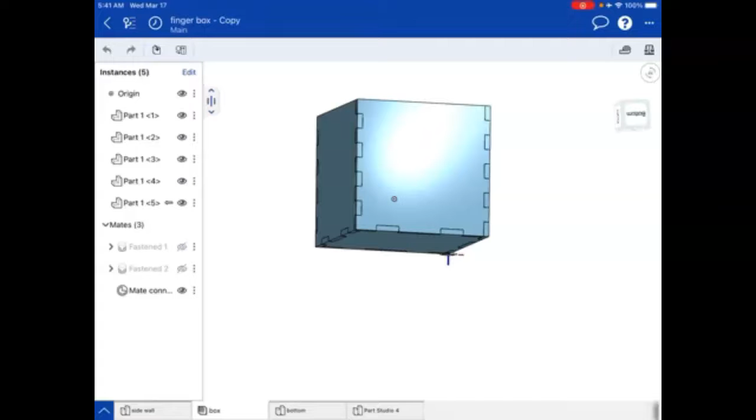All right, now let's say you're ready to laser cut and you're going to test two pieces to see if they fit together. I'm going to generate a file to laser cut the sidewall and the bottom of this box and show you how to do this. And you can choose any two parts that you want, but you want to choose two pieces that connect together as a trial to see if your design sketches are good.

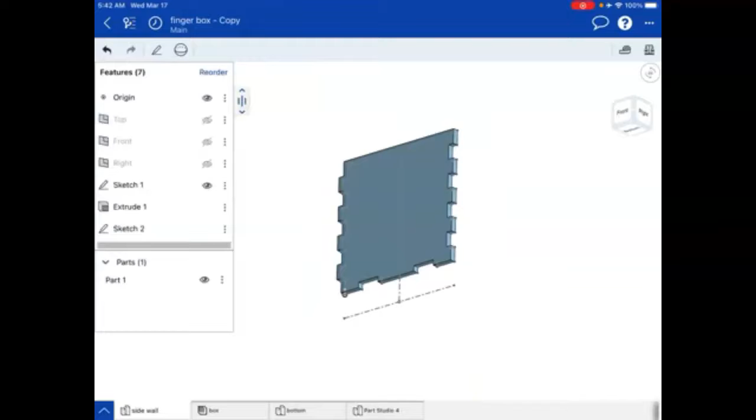So I've got my sidewall modeled here and my bottom piece on this tab. So what I'm going to do is I'm going to create another sketch and paste both of those sketches for each of those parts into that sketch. So I'm going to pretend like I'm starting a new sketch here, sketch 2. I'm going to click front, and then I'm going to hit the check mark. So if you notice, I now have sketch 2, but it's blank.

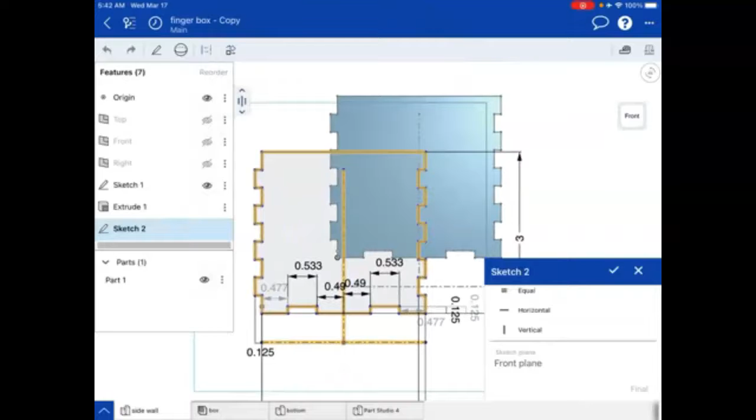I'm going to go to sketch 1, hit the 3 dots, copy sketch, and then go to the 3 dots next to sketch 2 and hit paste into sketch. And there it is. Okay. Now I'm going to open up sketch 2, hit edit, and I'm going to change my view, and I'm actually going to double tap. I'm going to turn on my trim tool, and I'm going to get rid of any lines, construction lines, that I don't want to send to the laser.

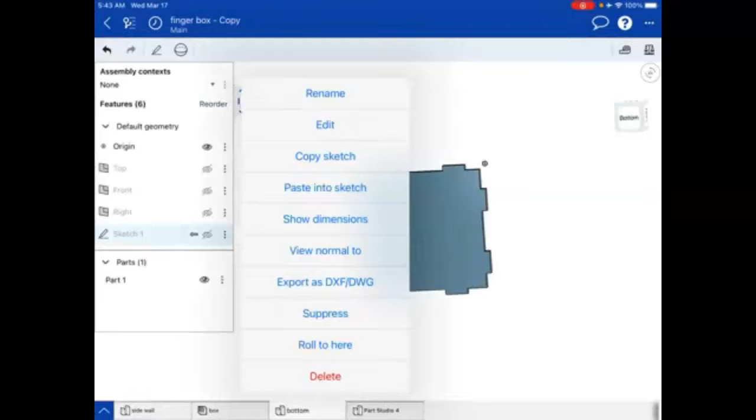Great. Okay, check. Now I'm going to go to that bottom piece and open up sketch 1. I want to hit copy sketch. So I'm copying the sketch for this piece, and I go back to the sidewall tab. Okay. And now I'm going to go to sketch 2, hit the 3 dots, and paste into sketch. And if you notice, it's highlighted. We want to keep it highlighted, so don't tap anywhere. If you do, you have to repeat this step.

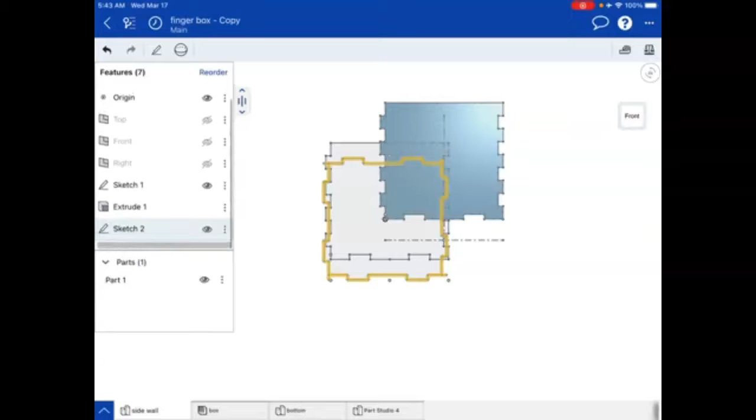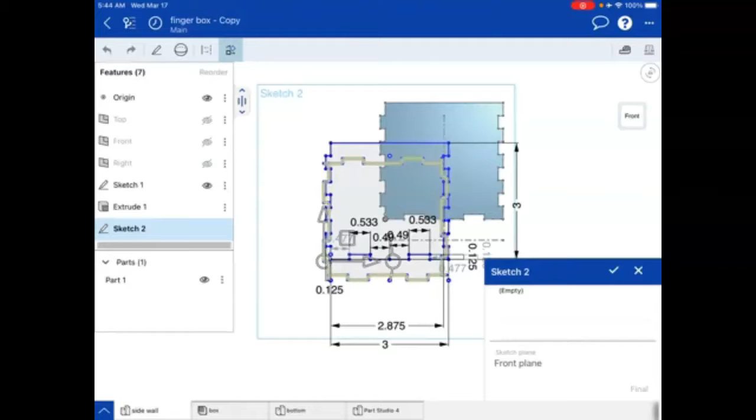So now I'm going to click on the 3 dots next to sketch 2 and select edit. And notice that the second sketch I dropped in from the bottom piece is still highlighted. Now I go to my tools and select transform, which is right next to dimension. And now I can move the second sketch. I can put my finger on either the arrows going right or up, or I can put my finger on the little square that I'm highlighting right now.

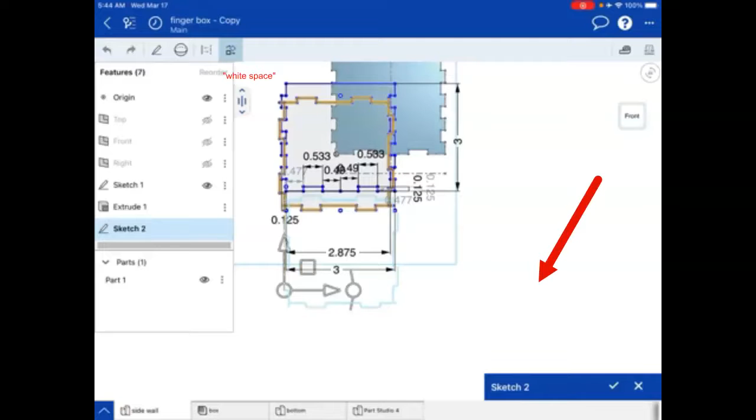And I want to move this piece so it's side by side with the other piece, either above and below or side by side. You just don't want them overlapping. So I'm going to move it as close together as possible without overlapping. Now I just tap in the white space and the pieces move. Okay, I'm going to turn off my transform function, and I'm going to zoom in. Over here I'm going to grab my trim tool. I've got these little lines sticking out that I don't want. You may or may not have those.

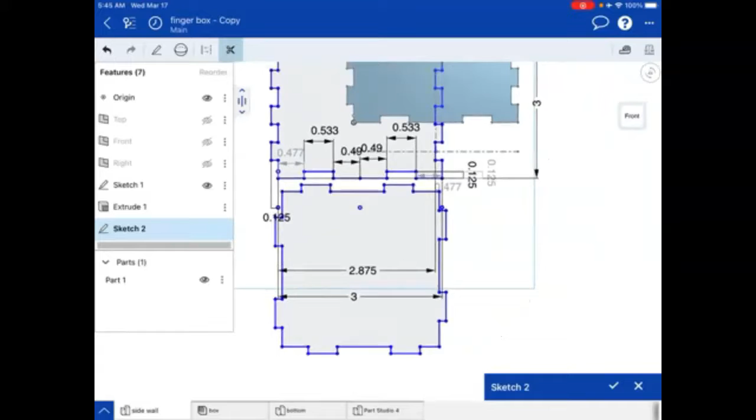Okay, so it looks cleaned up. I've got no construction lines. I'm done with sketch 2. And now I'm ready to export this file. So I go to sketch 2, export as DXF DWG. Make sure you put your name, your period. I'm going to write 9. And then what you're printing, side and bottom.

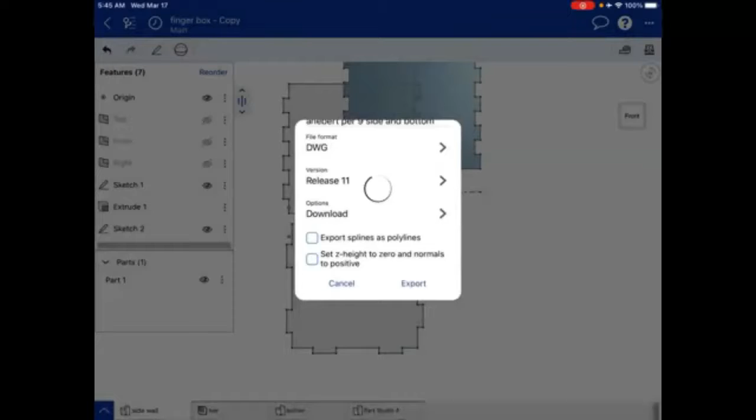Your file format is, you want a DWG, and that's the default. Scroll down, and at the bottom on the right hand side you'll see export. Okay. If you don't already have a PLTW folder, make sure you create one. You can use the plus sign or plus folder symbol next to the word save to create one, and then make sure you have that folder highlighted when you press save.

Now I'm going to go to my Files app, and if I go into on my iPad, that's where I was when I created that file, I go to PLTW. You can see on the top right, it says A. Hebert, period 9. That's what I just created. And then this is the file that you will upload to Canvas. So this is the file you need to navigate to when you submit in Canvas.